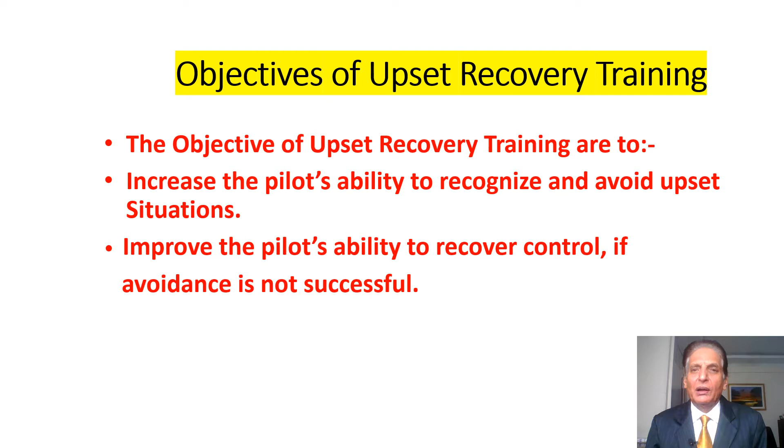First of all, we shall have a look at the objectives of upset recovery training. The objectives of upset recovery training are to increase the pilot's ability to recognize and avoid upset situations, and improve the pilot's ability to recover control if avoidance is not successful.

Now we shall discuss causes of airplane upset. First of all, it may be environmentally induced, systems-anomalies induced, pilot induced, or a combination of all three above.

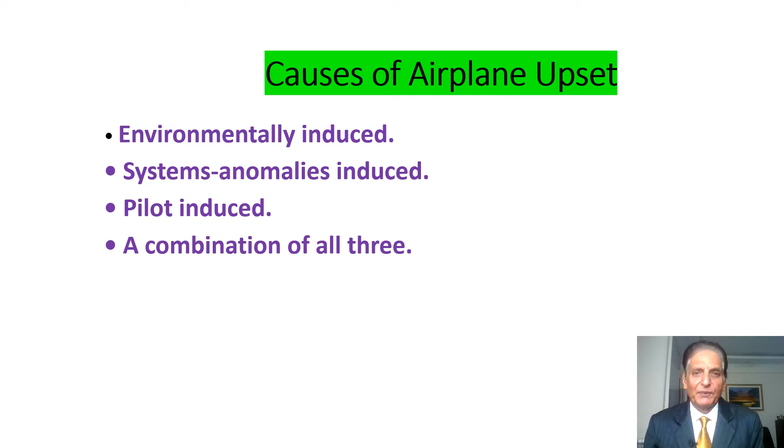Now we shall discuss the environmentally induced factors. First one is turbulence, then clear air turbulence, mountain wave, wind shear, thunderstorms, microbursts, wake turbulence, and airplane icing.

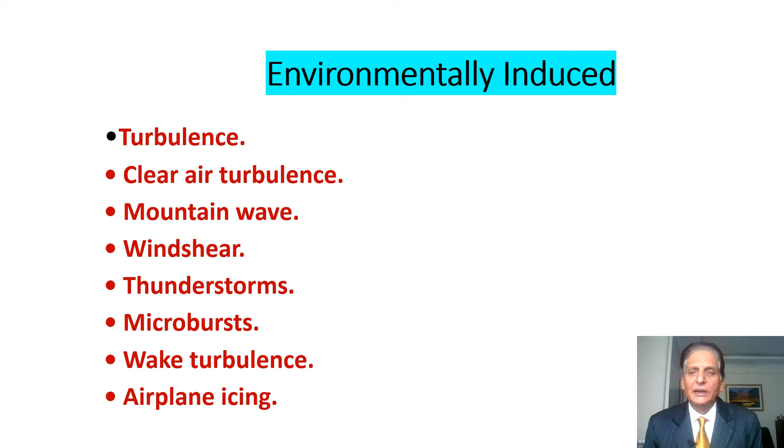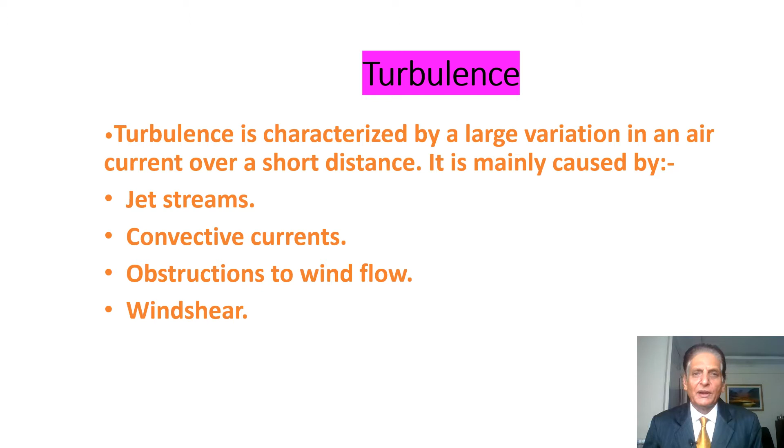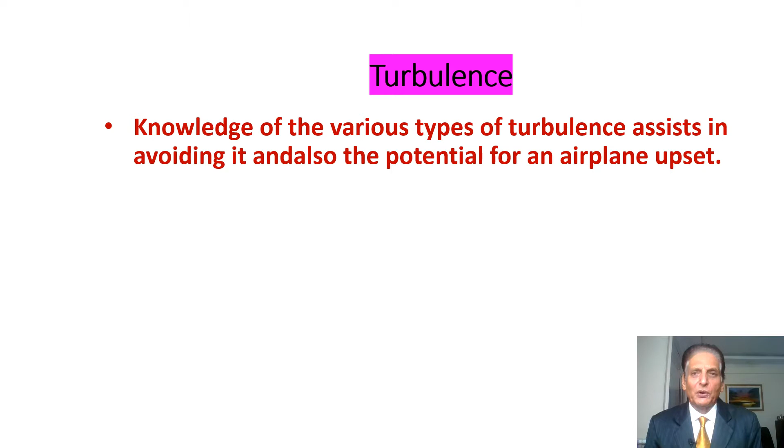First, we shall discuss turbulence. Turbulence is characterized by a large variation in an air current over a short distance. It is mainly caused by jet streams, convective currents, obstructions to wind flow, and wind shear. Knowledge of the various types of turbulence assists in avoiding it and also the potential for an airplane upset.

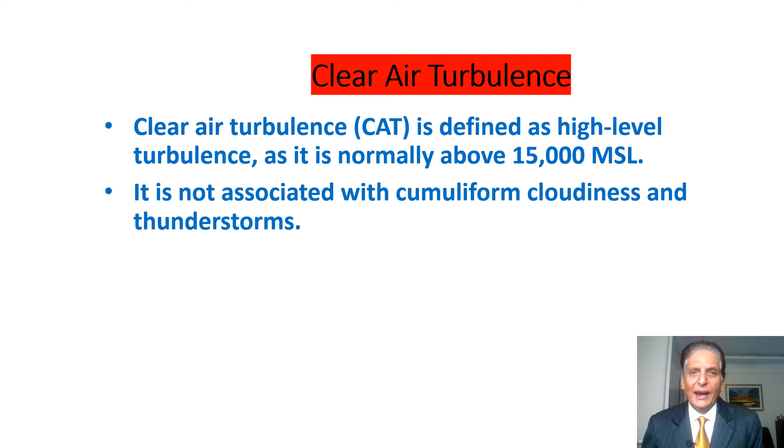Clear air turbulence is defined as high level turbulence, as it is normally above 15,000 feet above mean sea level. It is not associated with cumuliform cloudiness and thunderstorms. Clear air turbulence is categorized by marked changes in pressure, temperature, wind direction, and wind velocity.

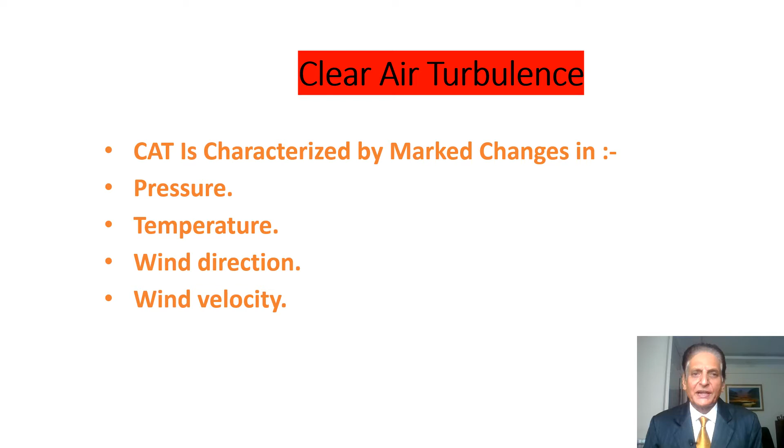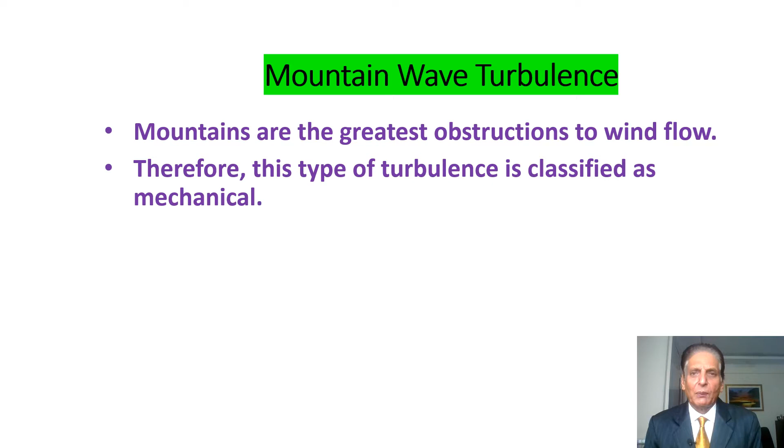Now we will discuss mountain wave turbulence. Mountains are the greatest obstruction to wind flow, therefore this type of turbulence is classified as mechanical. Rotor or lenticular clouds over mountains are a sure sign of mountain wave turbulence, but sometimes the air may be too dry to show these clouds. Severe turbulence can be expected in mountainous areas if the perpendicular wind component exceeds 50 knots.

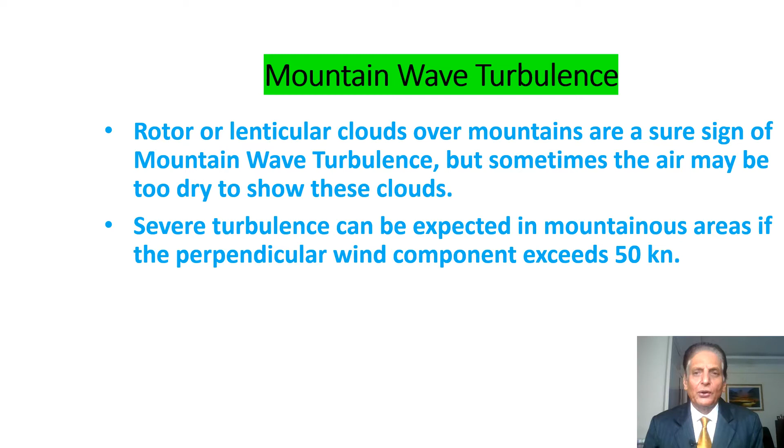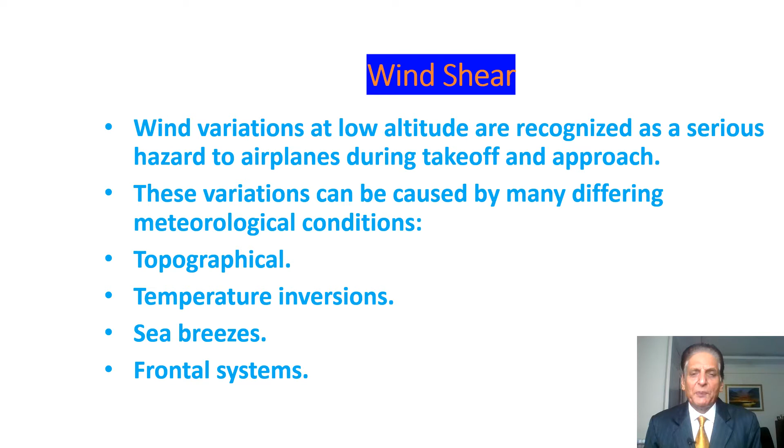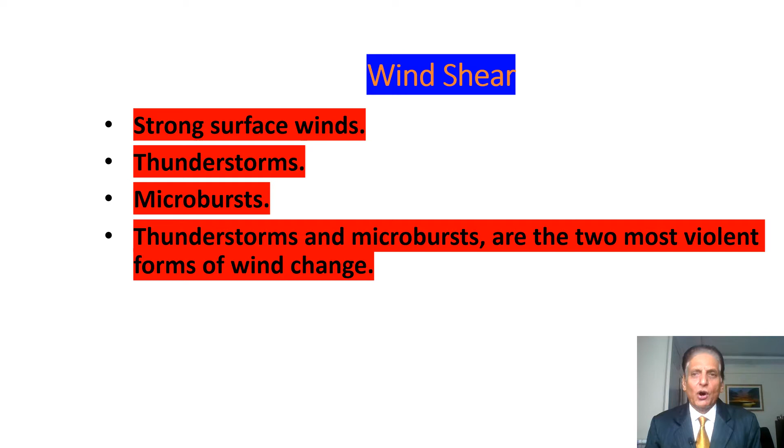Now we shall discuss wind shear. Wind variations at low altitude are recognized as a serious hazard to airplanes during takeoff and approach. These variations can be caused by many differing meteorological conditions: topographical effects, temperature inversions, sea breezes, and frontal systems, also strong surface winds, thunderstorms, and microbursts. Thunderstorms and microbursts are the two most violent forms of wind change.

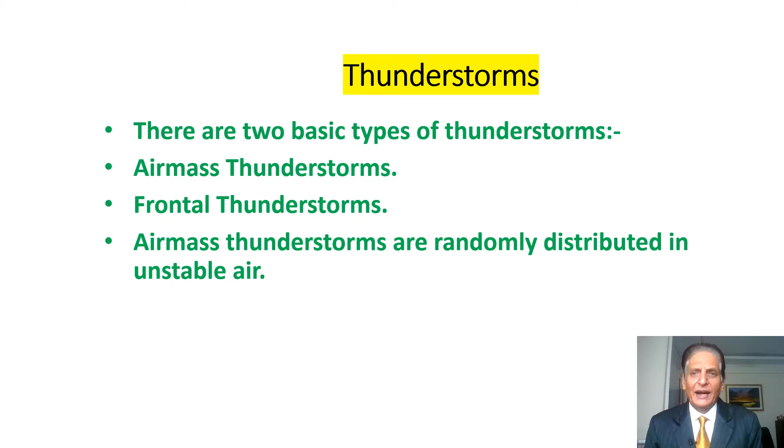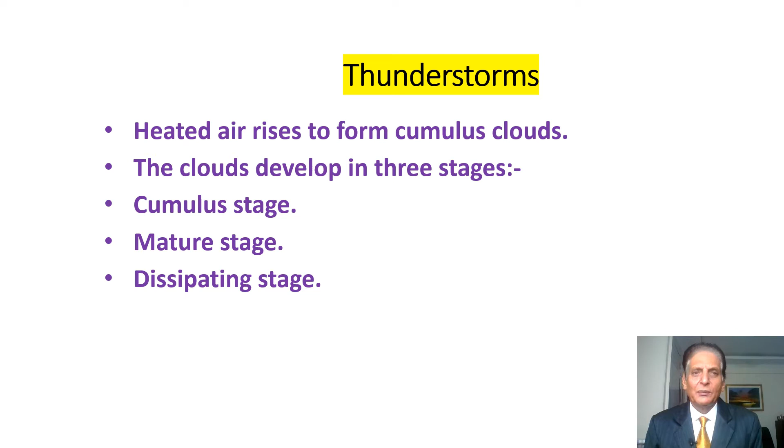Let's now discuss thunderstorms. There are two basic types: air mass thunderstorms and frontal thunderstorms. Air mass thunderstorms are randomly distributed in unstable air. Heated air rises to form cumulus clouds, and the clouds develop in three stages: cumulus stage, mature stage, and dissipating stage.

The gust front produced by the downflow and outrush of rain-cooled air can produce very turbulent air conditions.

Frontal thunderstorms are associated with weather systems like fronts, converging winds, and troughs aloft. They form in squall lines, last for several hours, generate heavy rain and possibly hail, and produce strong gusty winds and possibly tornadoes. The downdraft of a typical frontal thunderstorm is about 1 to 5 miles in diameter, and the resultant outflow may produce large changes in wind speed.

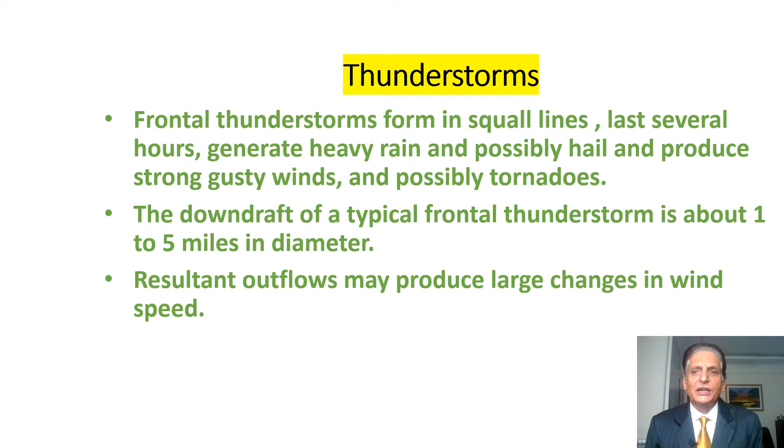Now look at the microburst. Microbursts can occur during convective weather conditions. 5% of all thunderstorms produce microbursts. Downdrafts are a few hundred to 3,000 feet across.

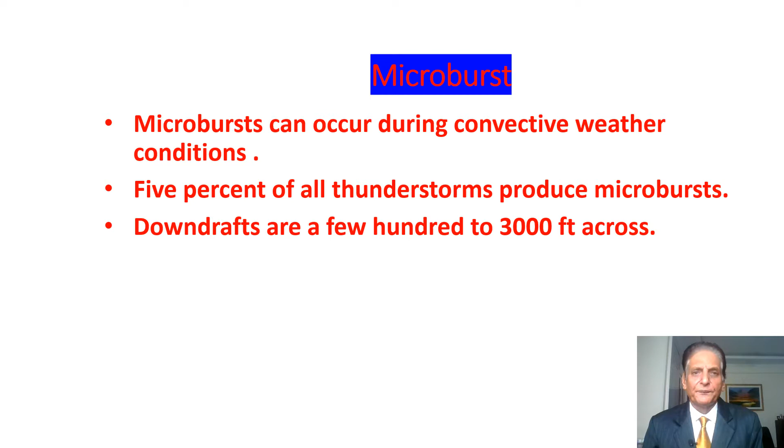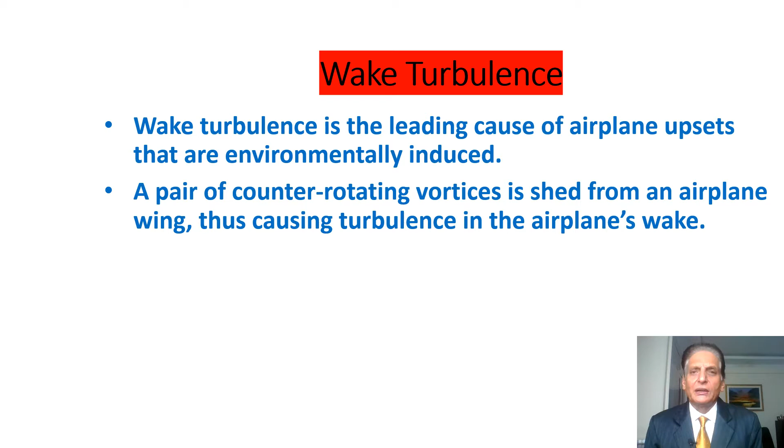Now we'll talk about wake turbulence. Wake turbulence is the leading cause of airplane upsets that were environmentally induced. A pair of counter-rotating vortices is shed from an airplane wing, thus causing turbulence in the airplane's wake. The strength of the turbulence is a function of airplane weight, wingspan, and speed.

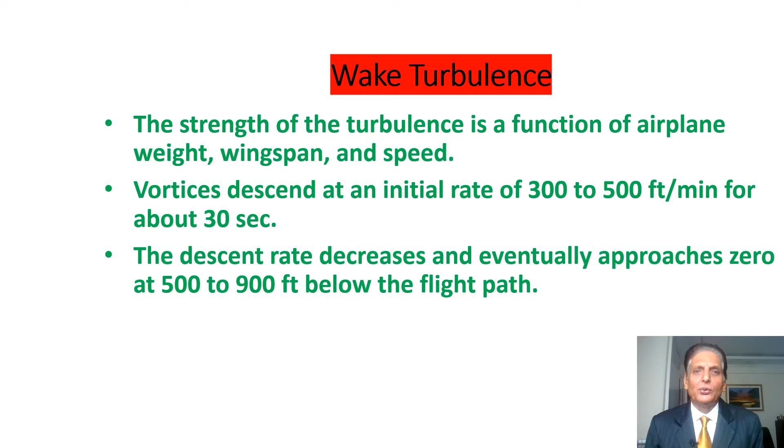Vortices descend at an initial rate of 300 to 500 feet per minute for about 30 seconds. The descent rate decreases and eventually approaches zero at 500 to 900 feet below the flight path. Maintaining a vertical separation of at least 1000 feet below the flight path is generally considered safe. Pilots have likened a wake turbulence encounter to hitting a wall.

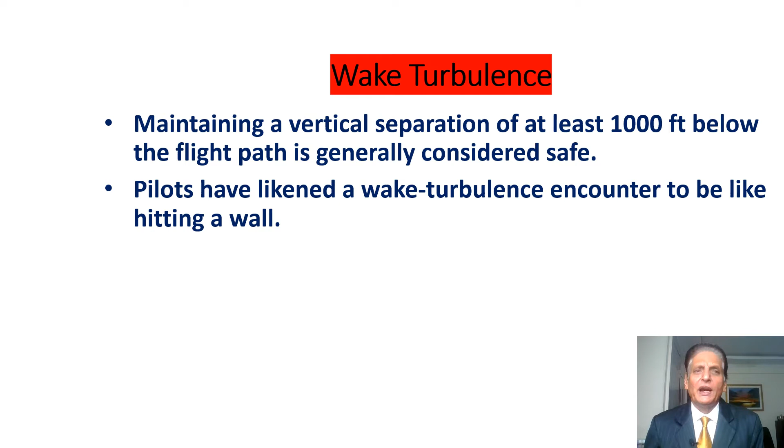Now we shall discuss airplane icing. Large degradation of airplane performance can result from the surface roughness of an extremely small amount of ice contamination. The handling characteristics and maximum lift capability of the aircraft can be adversely affected.

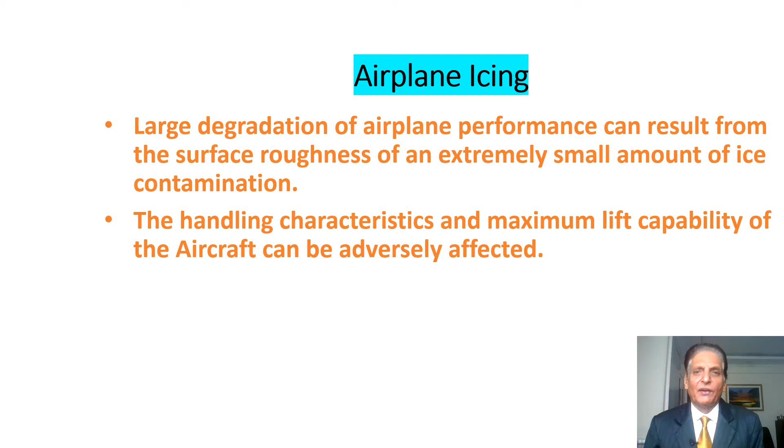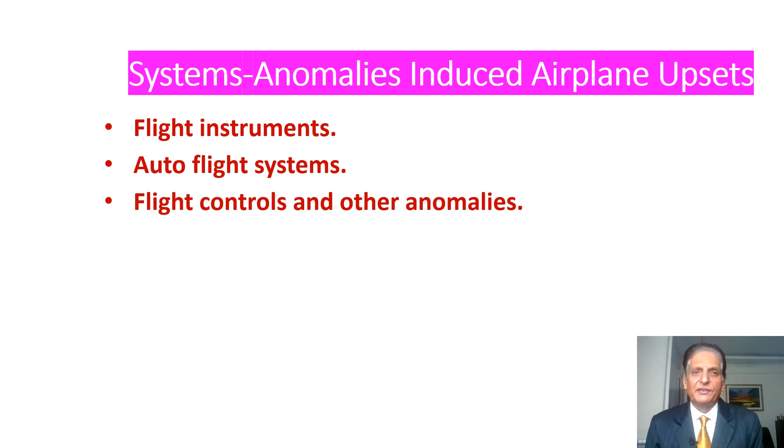Now let's have a look at the systems anomalies induced airplane upsets. This can be due to the flight instruments, auto-flight systems, flight control, and other anomalies.

In spite of improved airplane design, intensified training programs, and improved reliability, system failures can take place, and some of these failures can lead to an airplane upset. Most failures are survivable if the flight crew makes correct responses.

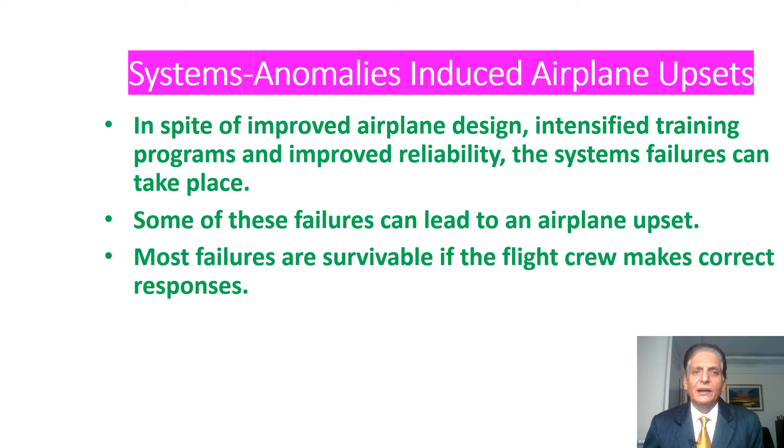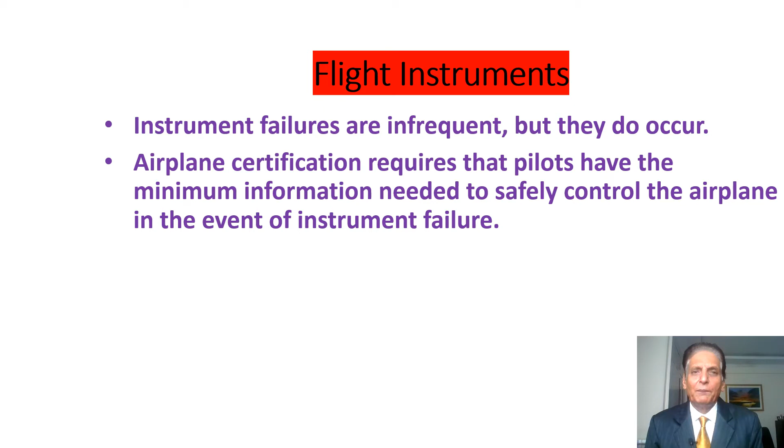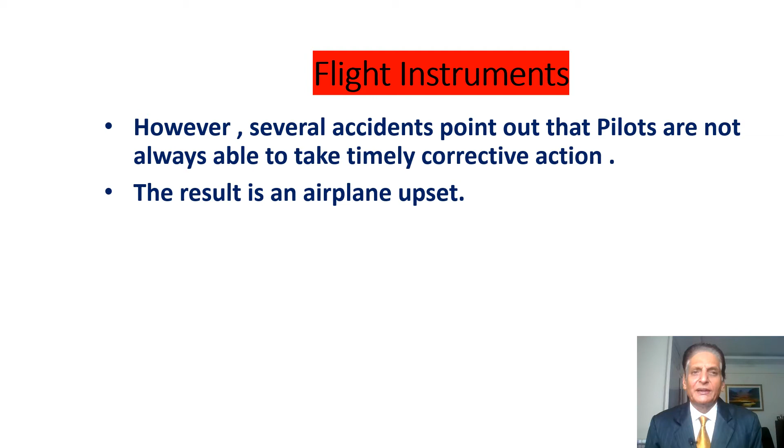Now we'll discuss how flight instruments can lead to upset conditions. Instrument failures are infrequent, but they do occur. Airplane certification requires that pilots have the minimum information needed to safely control the airplane in the event of instrument failure. However, several accidents point out that pilots are not always able to take timely corrective action, which can result in an upset situation.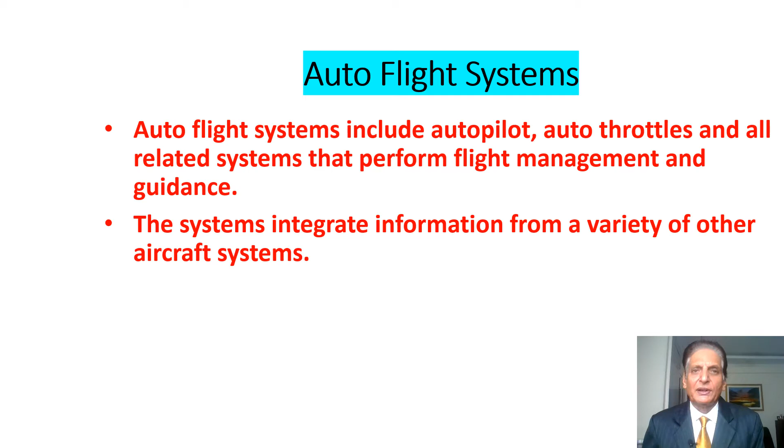Now, the auto flight systems, which include autopilot, autothrottles, and all related systems that perform flight management and guidance, integrate information from a variety of other aircraft systems. Pilots have tended to develop a great deal of confidence in these systems, which has led to complacency in some cases. Although auto-flight systems are quite reliable, failures do occur, and these failures have led to airplane upsets and accidents.

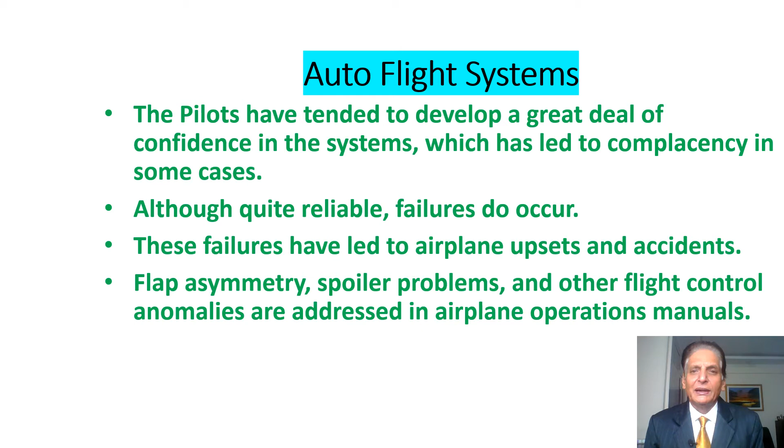Flap asymmetry, spoiler problems, and other flight control anomalies are addressed in the airplane operations manual. Airplane certification requirements ensure that pilots have sufficient information and are trained to handle these critical failures. However, it is the unexpected that can cause problems, particularly during critical phases of flight.

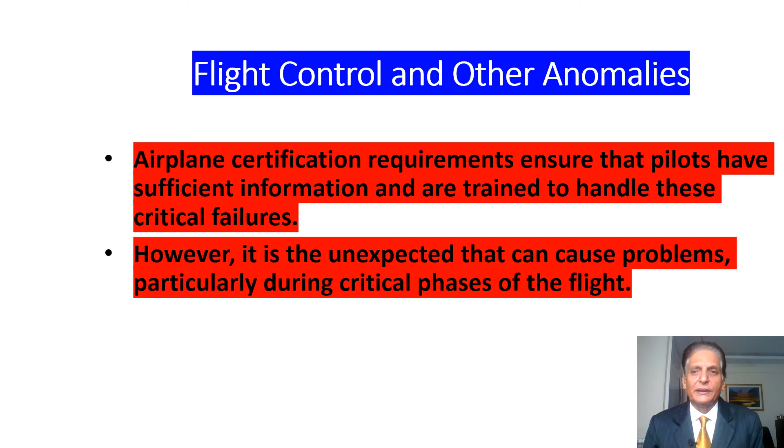Now we shall discuss pilot-induced airplane upsets. Sensory inputs of the pilots can be misleading, especially when the pilot cannot see the horizon. Inattention and distraction from primary cockpit duties, and vertigo or spatial disorientation, have also led to airplane upsets. Improper use of airplane automation is also one of the factors.

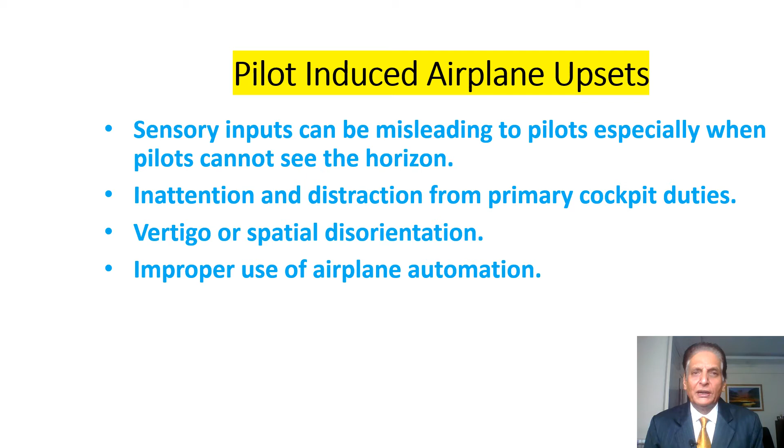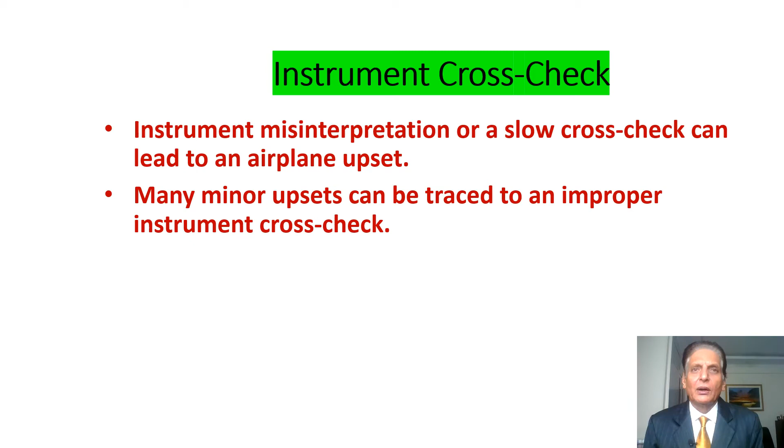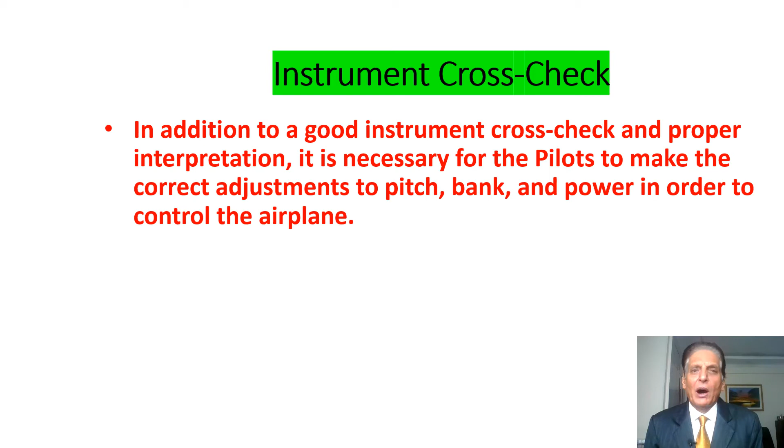Next, we'll talk about instrument cross-check. Instrument misinterpretation or a slow cross-check can lead to an airplane upset. Many minor upsets can be traced to an improper instrument cross-check. In addition to a good instrument cross-check and proper interpretation, it is necessary for pilots to make the correct adjustments to pitch, bank, and power in order to control the airplane.

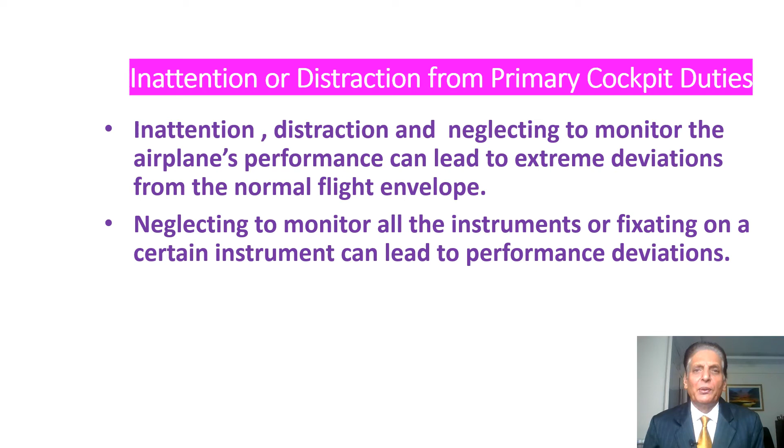Inattention and distraction from primary cockpit duties have also led to airplane upsets. Neglecting to monitor airplane performance can lead to extreme deviation from the normal flight envelope. Neglecting to monitor all the instruments or fixating on a certain instrument can lead to performance deviations. Distractions can be very subtle, such as warning or caution lights illuminating during critical phases of flight. Many airplane upsets occur while the pilot is engaged in some task that takes attention away from the flight instruments. Controlling the airplane first should always be the guiding principle for pilots.

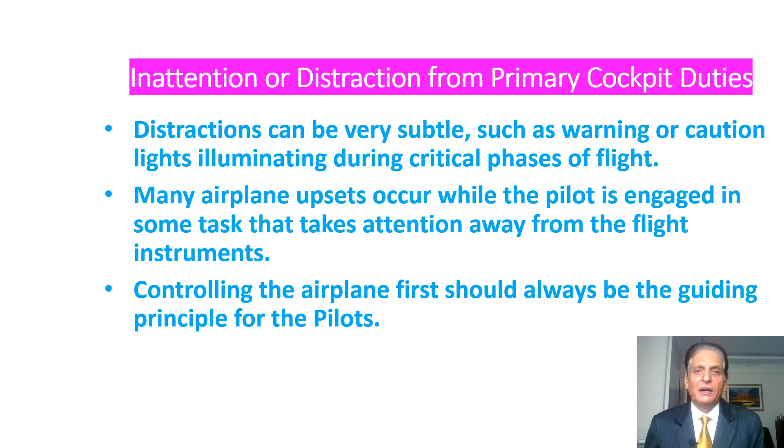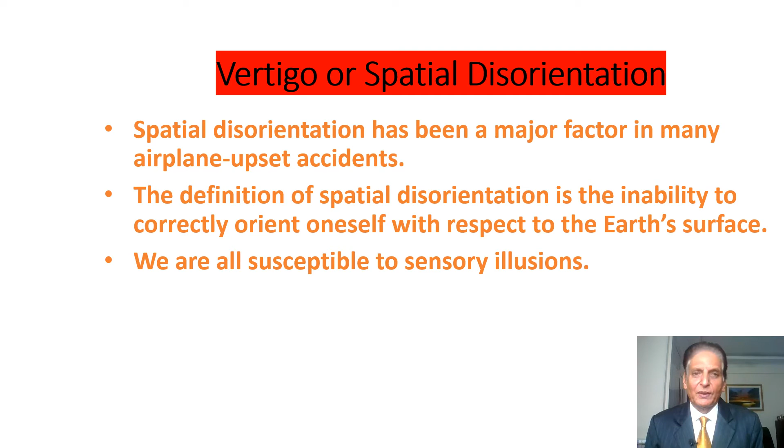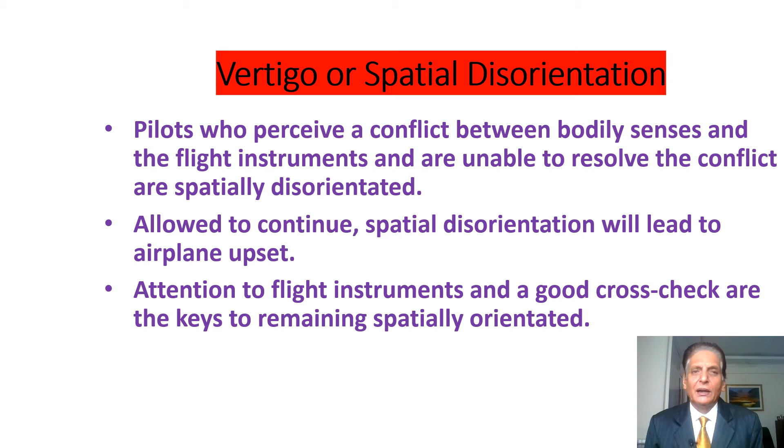Now we shall discuss vertigo, or spatial disorientation. Spatial disorientation has been a major factor in many airplane upset accidents. It is defined as the inability to correctly orientate oneself with respect to the Earth's surface. We are all susceptible to sensory illusions. Pilots who perceive a conflict between bodily senses and the flight instruments and are unable to resolve that conflict are spatially disoriented. Allowed to continue, spatial disorientation will lead to airplane upset. Attention to flight instruments and a good cross-check are keys to remaining spatially orientated.

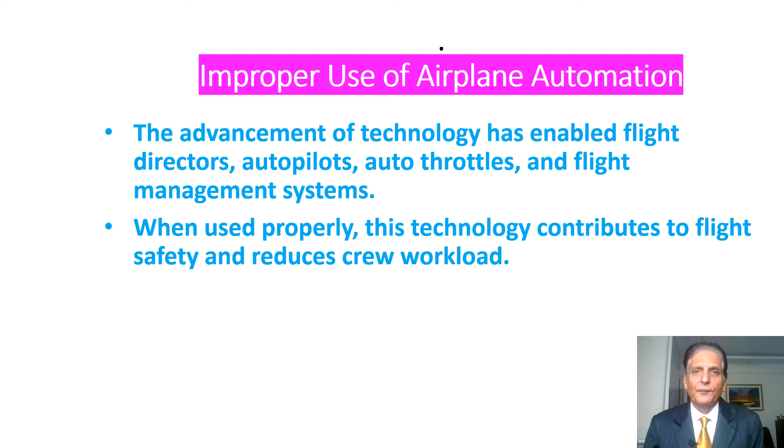Now we shall discuss improper use of airplane automation. The advancement of technology has enabled flight directors, autopilots, autothrottles, and flight management systems. When used properly, this technology contributes to flight safety and reduces crew workload. Complacent and improper use of these systems is a major concern. These systems can and do fail, leading to airplane upsets and accidents.

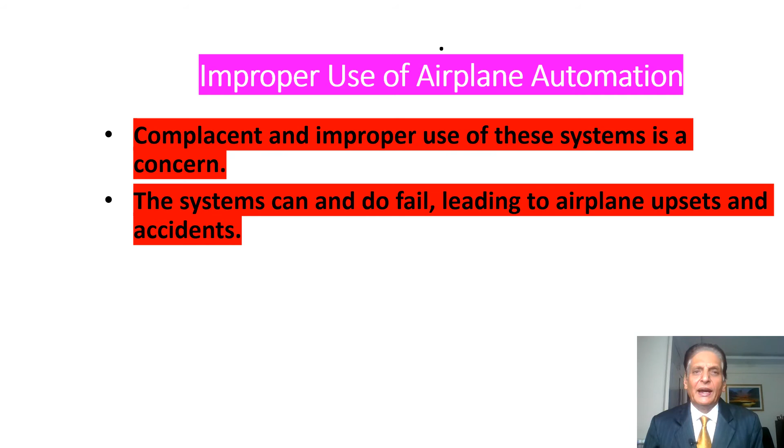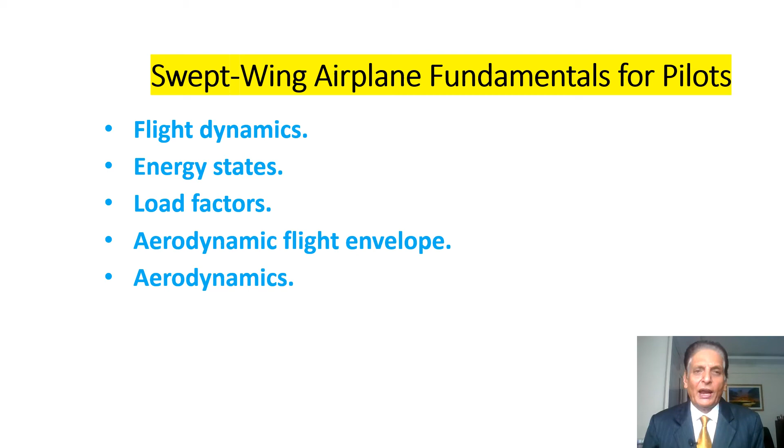Now we shall discuss swept wing airplane fundamentals for pilots. First, we shall discuss flight dynamics, then energy states, load factors, aerodynamic flight envelope, and aerodynamics in general. In understanding the flight dynamics of a large swept wing transport airplane, it is important first to understand what causes the forces and moments acting on the airplane, and then move to what kind of motion these forces cause. With this background, we can gain an understanding of how a pilot can control these forces and moments in order to direct the flight path.

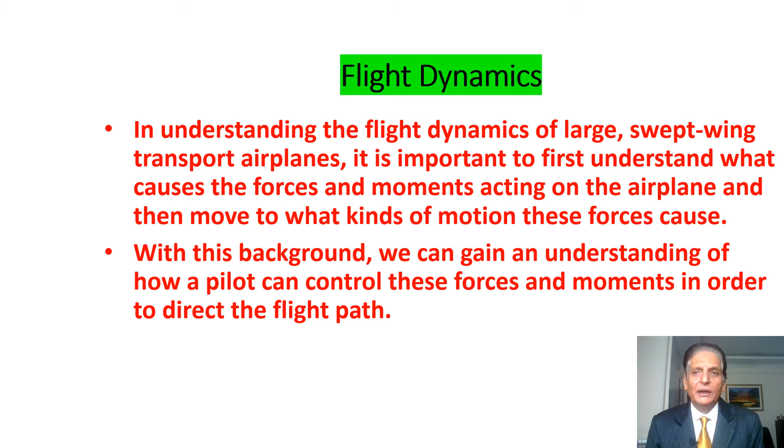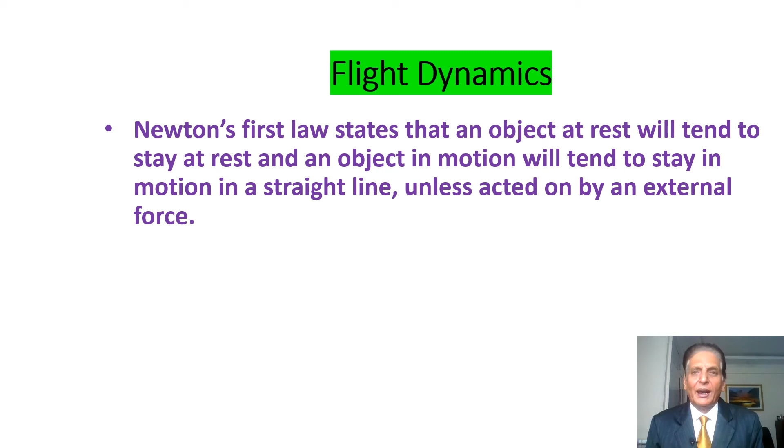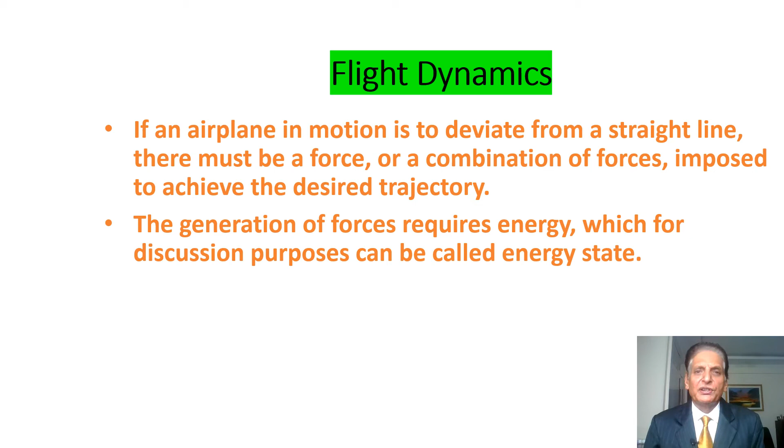Newton's first law states that an object at rest will tend to stay at rest, and an object in motion will tend to stay in motion in a straight line, unless acted on by an external force. If an airplane in motion is to deviate from a straight line, there must be a force, or combination of forces, imposed to achieve the desired trajectory. The generation of forces requires energy, which for discussion purposes can be called energy state.

Now we shall discuss the energy state of the aircraft. The term energy state describes how much of each kind of energy the airplane has available at any given time.

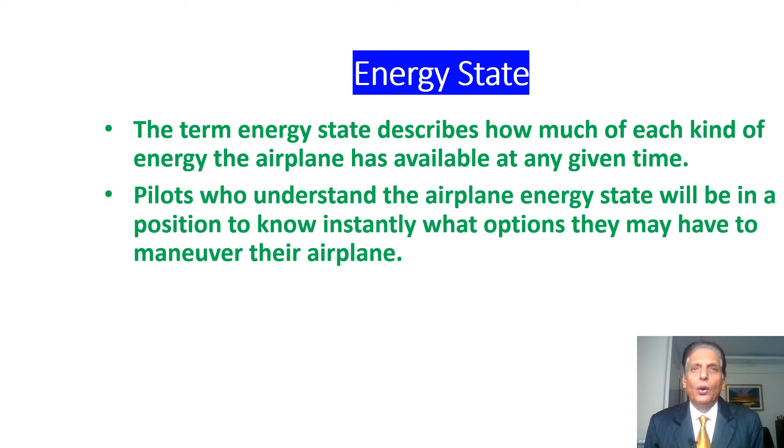Pilots who understand the airplane energy state will be in a position to know instantly what options they may have to maneuver their airplane.

The three sources of energy available to the pilot are kinetic energy, which increases with increasing speed; potential energy, which is approximately proportional to altitude; and chemical energy, that is fuel available in the tanks.

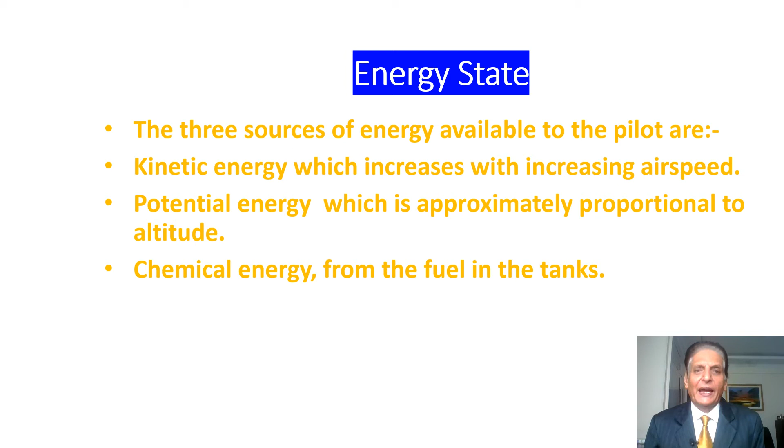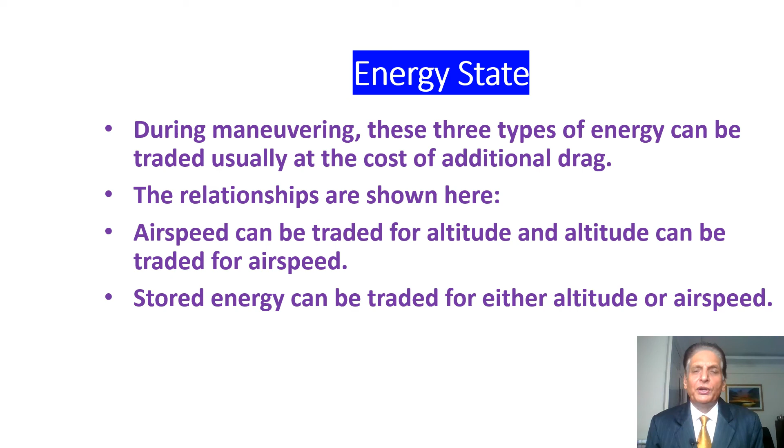During maneuvering, these three types of energy can be traded, usually at the cost of additional drag. The relationships are: airspeed can be traded for altitude, and altitude can be traded for airspeed. Stored energy can be traded for either altitude or airspeed.

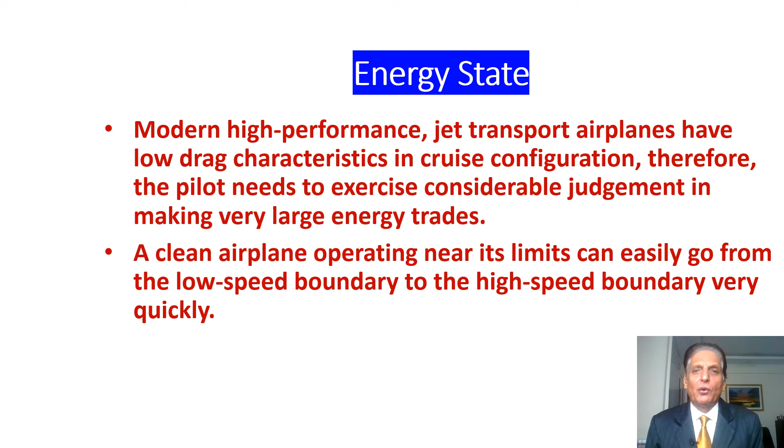Modern high-performance jet air transport airplanes have low drag characteristics in cruise configuration. Therefore, the pilot needs to exercise considerable judgment in making very large energy trades. A clean airplane operating near its limits can easily go from the low speed boundary to the high speed boundary very quickly.

The process of controlling forces to change accelerations and produce a new energy state takes time. The longer time required by large airplanes requires that the pilot plan ahead that much more to achieve the final desired energy state.

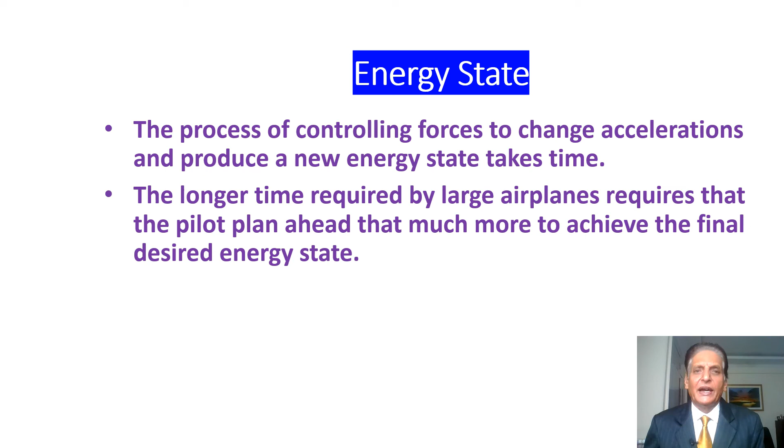The objective is to manage energy so that the kinetic energy stays between limits that are stall and placards, the potential energy stays within limits that are terrain to buffet altitude, and chemical energy stays above certain thresholds, that is, not running out of fuel.

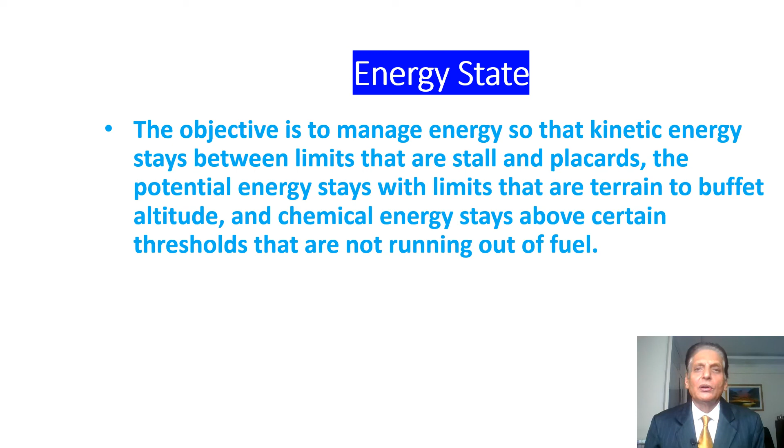Now we shall discuss the load factors.

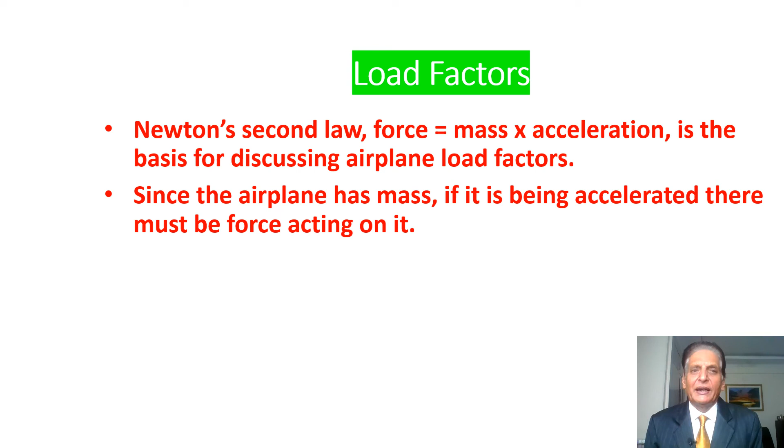Newton's second law, force equals mass times acceleration, is the basis for discussing airplane load factors. Since the airplane has mass, if it is being accelerated, there must be a force acting on it. Conversely, if there is a force acting on an airplane, it will accelerate.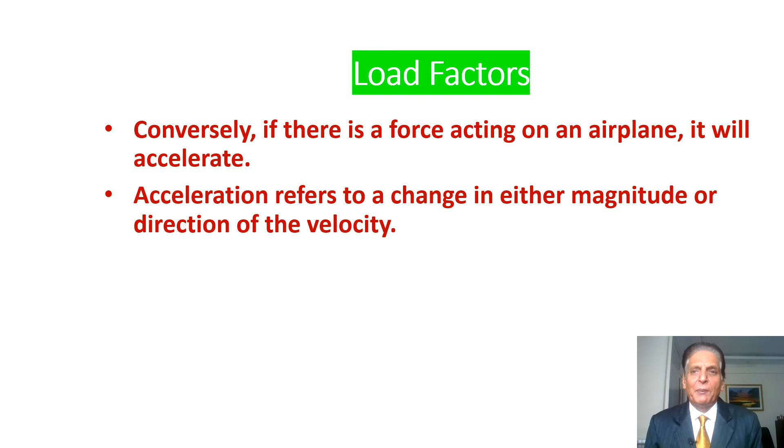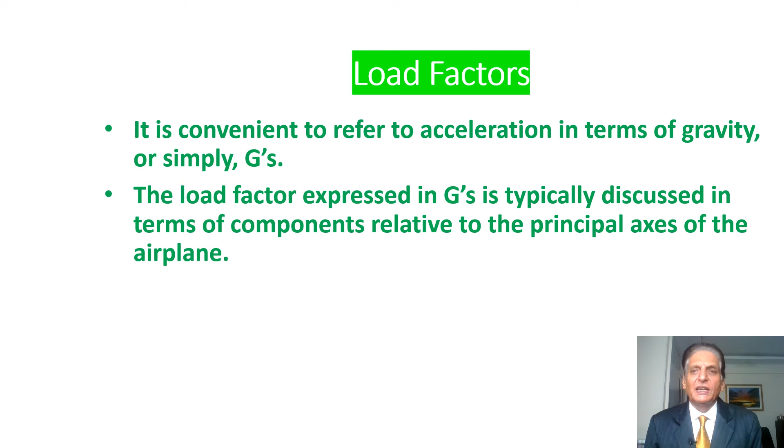Acceleration refers to a change in either magnitude or direction of the velocity. It is convenient to refer to acceleration in terms of gravity, which is called g. The load factor, expressed in g, is typically discussed in terms of components related to the principal axes of the airplane. Load factors can be longitudinal, lateral, or vertical.

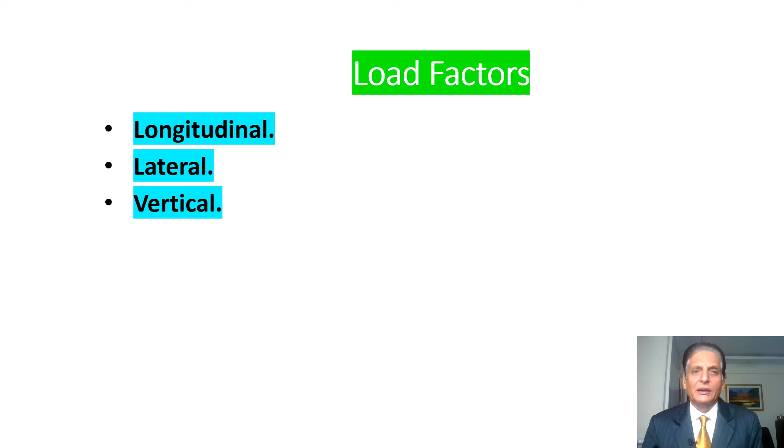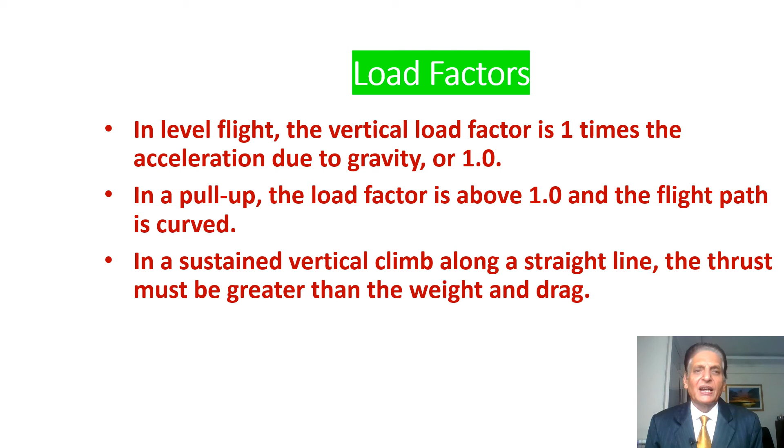In level flight, the vertical load factor is 1 times the acceleration due to gravity, that is 1 g. In a pull-up, the load factor is above 1 g and the flight path is curved. In a sustained vertical climb along a straight line, the thrust must be greater than the weight and drag.

The wing, and the load factor perpendicular to the airplane floor, must be zero. Anything but zero will produce a curved flight path.

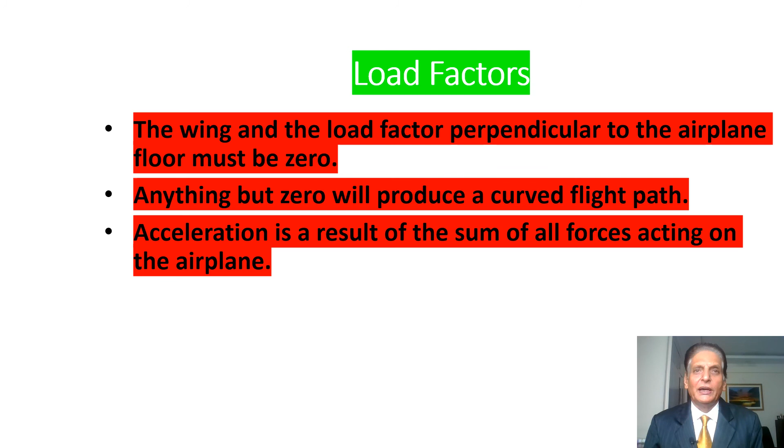Acceleration is a result of the sum of all forces acting on the airplane. One of these forces is always gravity, and gravity always produces an acceleration vector directed toward the center of the earth.

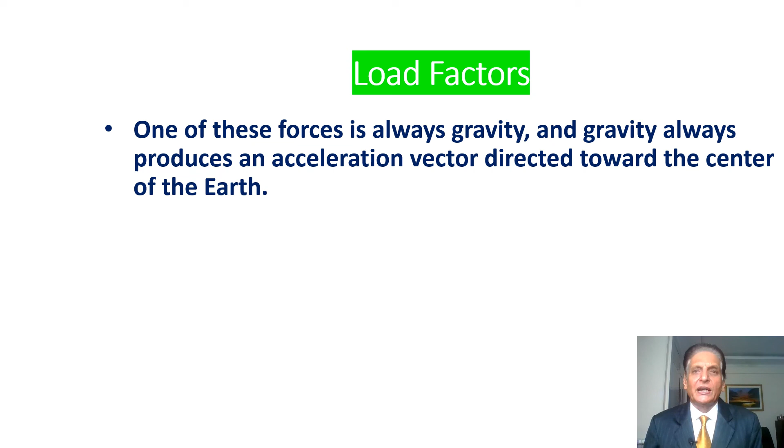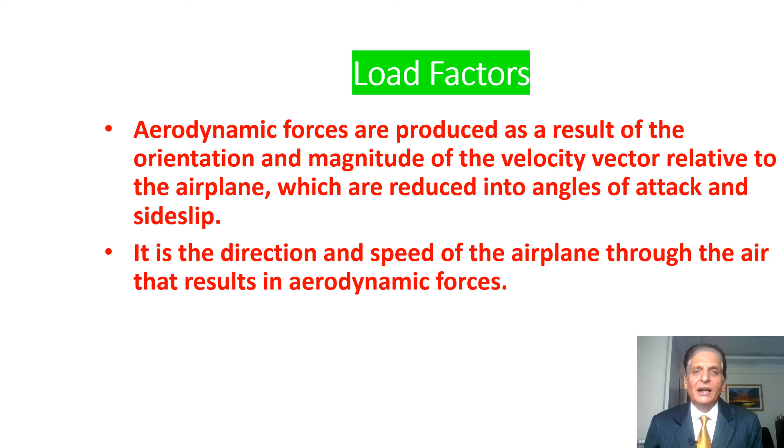Aerodynamic forces are produced as a result of the orientation and magnitude of the velocity vector relative to the airplane, which are reduced into angles of attack and side slip. It is the direction and speed of the airplane through the air that results in an aerodynamic force.

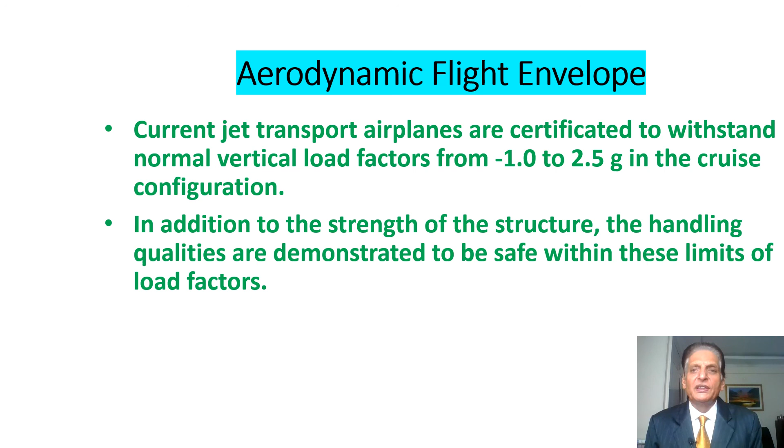Current jet transport airplanes are certificated to withstand normal vertical load factors from -1 g to plus 2.5 g in the cruise configuration. In addition to the strength of the structure, the handling qualities are demonstrated to be safe within these limits of load factors.

The pilot should be able to maneuver safely to and from these load factors at these speeds without needing exceptional strength or skill.

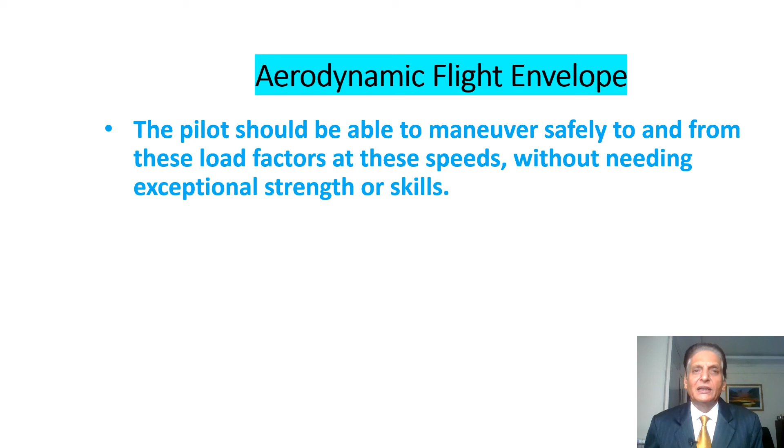In conclusion, airplane upsets are environmentally induced, system anomalies induced, and pilot induced, which have led to a number of serious incidents or accidents. The pilots must be aware of the cause of upset conditions of the aircraft so that they can prevent or recover from the upset condition in a competent and effective manner.

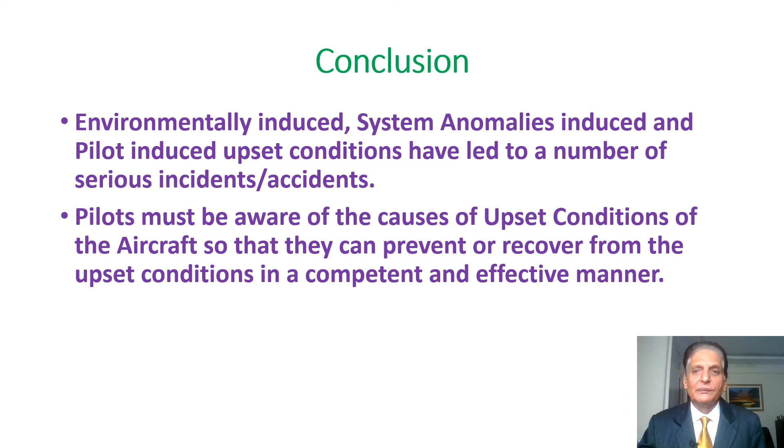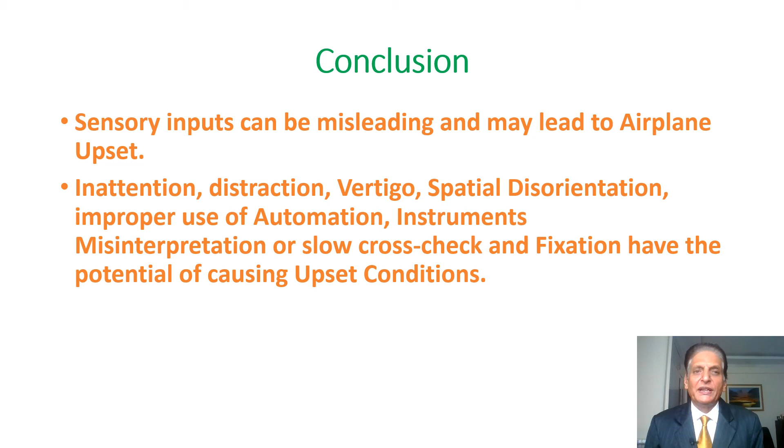Sensory inputs can be misleading and may lead to airplane upset. Inattention, distraction, vertigo, spatial disorientation, improper use of automation instruments, misinterpretation or slow cross-check, and fixation have the potential of causing upset conditions.

Pilots must understand flight dynamics and load factors. It is essential to remember that the first priority of the pilots must be to keep the airplane under control, and they have to be alert, vigilant, and situationally aware, particularly during critical phases of the flight, to prevent any airplane upset.